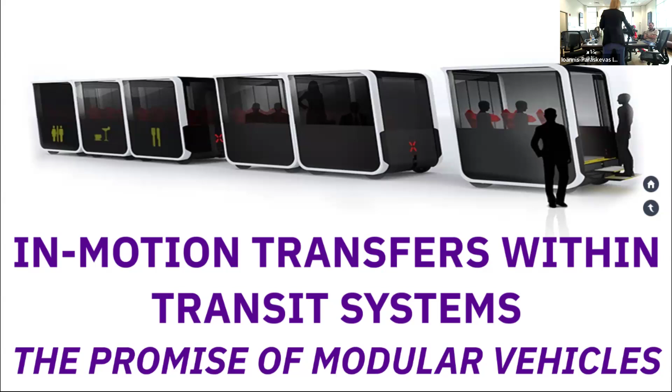Now, I understand public transportation is not the thing here in South Florida. I used to live here, so I know it could certainly be much better. But public transportation is way more sustainable than cars, right? From many different perspectives, it has a smaller environmental footprint and a smaller spatial footprint, so we can move more people in a smaller amount of space and with fewer resources.

So then why isn't it appealing in places like South Florida? There's a lot of traffic. I spent a lot of time today traveling from Miami here by car. So why are we still stuck to our cars if public transportation has so many benefits?

Because it also has a lot of challenges, and challenges differ across cities, etc. But I'm going to focus today on three challenges that are quite prevalent in cities around the world, and I'm going to try to address those challenges throughout the presentation today.

So first, the idea of bus bunching. I don't know if you've heard the terminology, but bus bunching is a well-known issue for quite a while. The idea is that with the stochasticity in traffic conditions, etc., deviations in headways, or the time between buses, compound over time. So what you end up having is buses bunching together, a lot of buses coming at once and then no buses at all. That presents an issue of reliability.

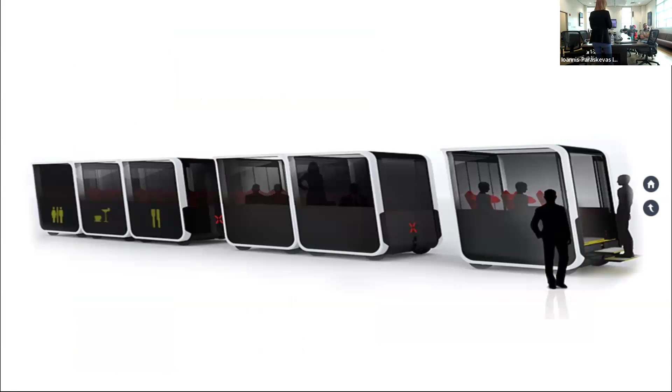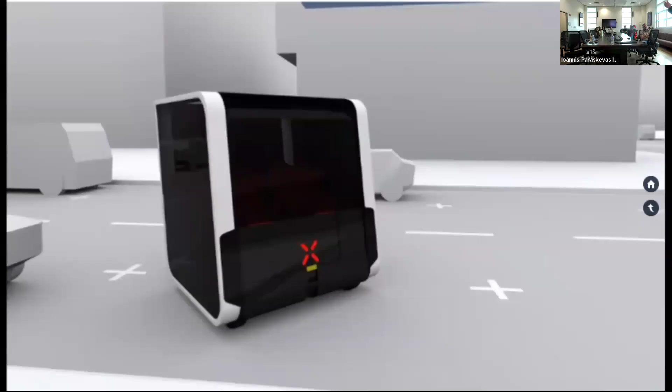So my proposal, or our proposal, is to use modular vehicle technology to address that. Now, I'm not sure if you're aware of modular vehicle technology — what is it? These are individual vehicles, or pods, or units, that can travel individually, or they can come together as a single bus or a single vehicle of higher capacity. The idea is that people can move between the vehicles while the vehicles are moving. That's what I call in-motion transfers.

The capacity typically for this specific company is 6 people if everyone is sitting, or 20 people if everyone is standing. But there are quite a few companies that are working on this.

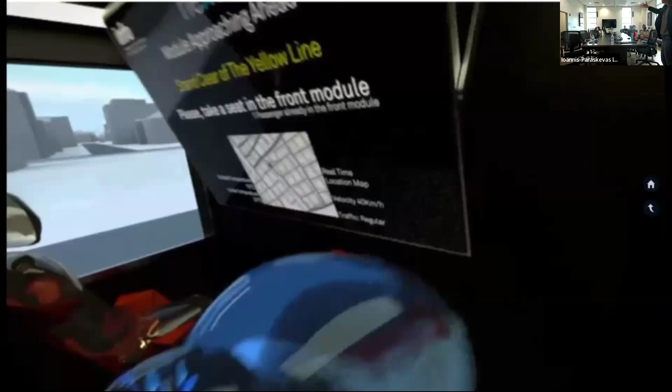The vehicles can split from each other or decouple and take different routes, or come together and form sort of a platoon within the same route, on the main route. This helps address a lot of the last vehicle mile problems.

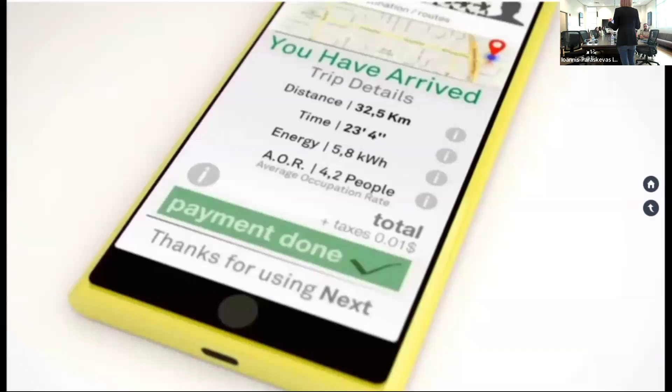There's a lot of studies about this, using this for on-demand transportation. All the cases that I'm going to be showing today are for fixed route public transportation or fixed route buses.

If I want to highlight the main features of this technology: their autonomy, the fact that these are autonomous vehicles, although they could have a driver. They're electric, so all the advantages associated with electric vehicles.

They offer variable capacity because you can have one small pod or multiple pods coming together and creating a bigger bus. And in-motion transfer between the pods, meaning people can move between the pods while they're moving, while en route.

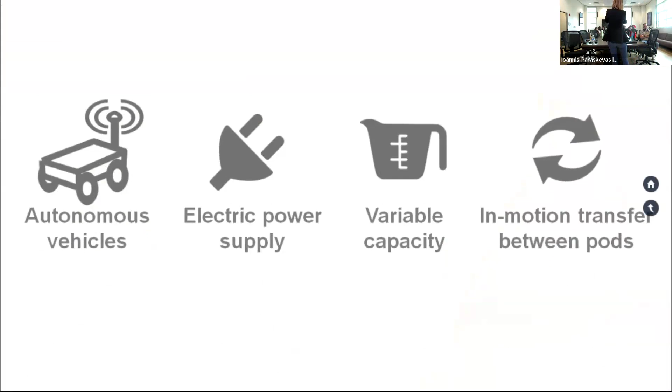For the presentation today, I'm going to be leveraging, in particular, this feature.

Do you have a question or no? Okay, sorry.

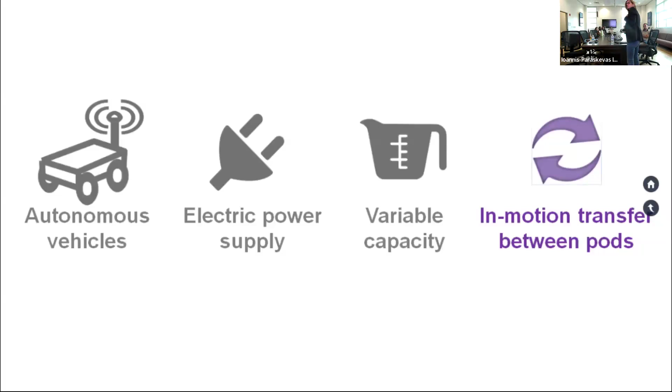The idea is to use this in-motion transfer to address these 3 problems. For the reliability, I'm going to be talking about 3 different sets of operations or proposals that we have for the operations of public transportation.

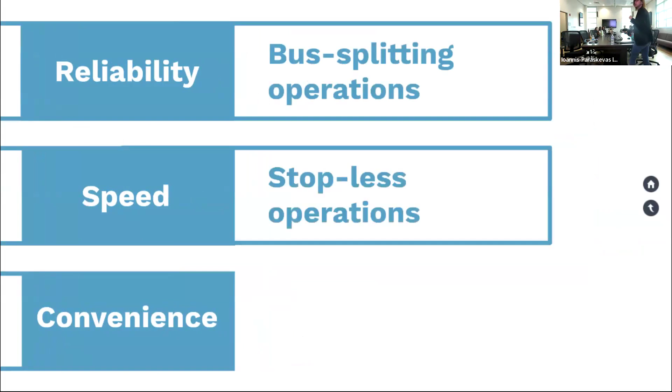To address the reliability issue, I'm going to be talking about what we call bus splitting operations. To address the speed issue, I'm going to be talking about stopless operations, a bus that doesn't stop, I'll go over that later. And for convenience, I'm going to be talking about transferless operations.

So I'm going to start with the reliability thing. As I said, bus bunching is a recurrent problem in public transportation. We have known about it forever.

There are many strategies to address it at the infrastructure level and at the operational level. Still, it's very recurrent everywhere.

One strategy that we're using as a basis or as a benchmark is what's called bus stop skipping. So when the buses are late, you skip a stop.

Now, theoretically, people have been talking about bus stop skipping for a while. Theoretically, it's very good. Practically, it's not, because when you skip a stop, the people who wanted to get off at that stop then have to walk back. And the people who were at the stop waiting for the bus need to wait for the next bus. So even though theoretically it has received a lot of attention, in practice, very, very few operators use this.

So what we propose in lieu of the stop skipping is bus splitting, because we can split now these buses into multiple units. So before I continue, I'm going to share some terminology that is going to be useful throughout the presentation.

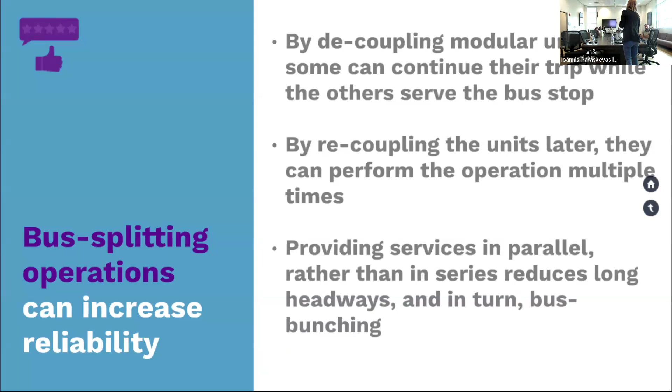So the idea with bus splitting is that these modules, the trailing and the leading module, can couple and decouple, and one of the modules can skip a stop while the other serves that stop, and they recouple later. They can do this operation many times, and that way they serve multiple stops in parallel rather than in series, and that saves time and addresses the issue of reliability.

So let me show you with a graphic more or less how it works. Let's assume you have a bus coming there, and that is running late for whatever reason, traffic conditions or whatever, is running late. So before it gets to the stop that I'm going to call the control stop, that's a stop where it splits.

It doesn't always have to split, if it's running late or something. The passengers must rearrange. If you're going to a control stop, you move to a trailing unit, to the unit in the back, to a blue unit. If you are going to the next stop, you move to the leading unit. The rest of the people can distribute themselves any way they want.

So then these two units, they decouple. The trailing unit stops at the control stop while the leading unit continues to the next stop. They sort of serve these stops in parallel and they recouple later. The blue unit stops here very briefly just to recouple and they continue.

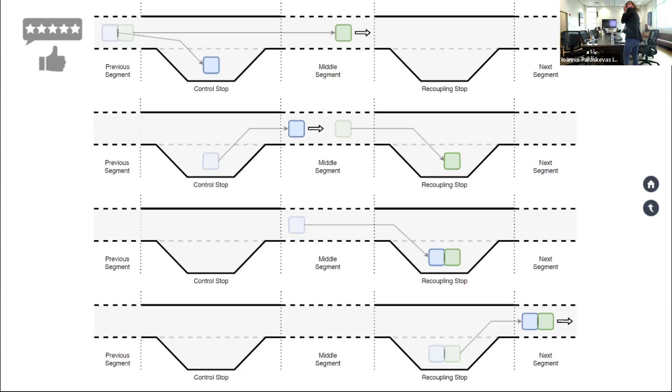So showing you this with a time-space trajectory. I'm not sure how familiar everyone is with time-space trajectories, but I'm just going to go briefly over them because I'm going to show them multiple times.

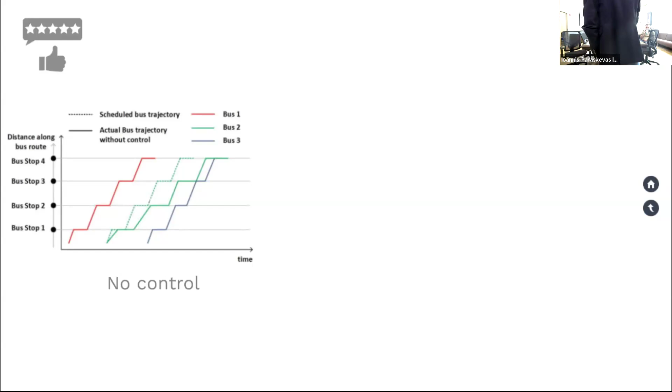But here it goes slower than it should because whatever, there was an accident, traffic. So by the time it gets to stop number 2, there are more people waiting. This is typically what leads to bus bunching. So the dwell time there is a little bit longer because you have more people boarding and alighting, or more people boarding at least. And then even though it catches up on speed afterwards, every time it gets later and later.

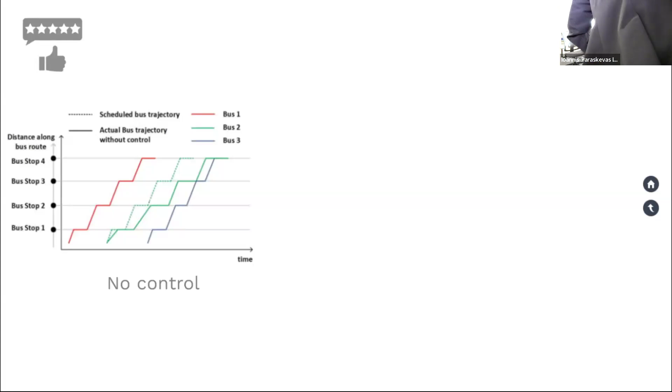The next bus, the blue bus, by the time it gets to a stop, there's less people waiting because the other bus just left. And so these buses start coming together and getting farther apart from the other buses. That's called bus bunching.

In a case of stop skipping, what you would do is that the bus, as it's getting to stop 2, it skips stop 2. So very good for keeping up with the schedule, very bad for the passengers. From the operator perspective, it makes sense. From the user perspective, it's awful.

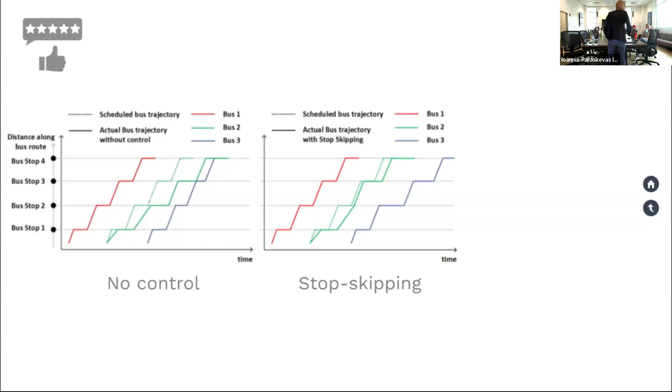What we're saying is in bus splitting, by the time it gets here, the leading unit continues to the next stop while the trailing unit stops. And then they catch up later on.

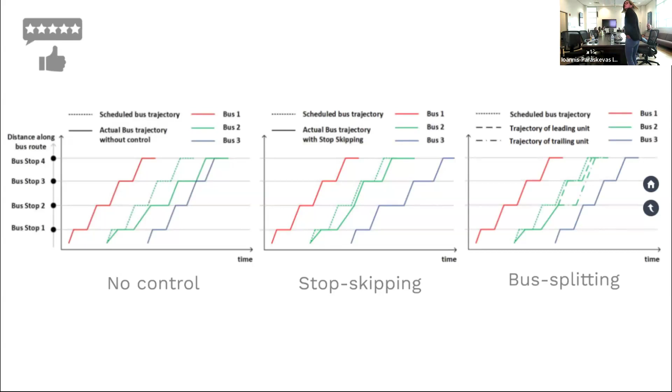So how do we model this? We use a discrete macroscopic model and compare 3 types of operations: what if you have no control at all, or conventional bus system; what if you have stop skipping, which we're using as our benchmark; and bus splitting, which is what we're proposing.

And the goal of what we're doing is to minimize the headway deviations. Headway deviations increase the waiting time tremendously, and the waiting time is worse than the in-vehicle time in terms of passenger experience. So that makes the public transportation system very unappealing. So we want to minimize the headway deviations, the mean absolute percentage error of the headways. And we also want to minimize the total passenger cost, which is waiting cost, plus in-vehicle cost, plus walking cost in the case of stop skipping, because you have to walk back.

And our operations are very simple. Our policies are simple. We are not focusing on the control part here. These are the simplest operations that we could think of for this type of system. They're non-predictive, so I don't know what's going to happen in the future. They're distributed, so each bus is making this decision individually. And they're myopic, meaning you're not looking at what's going on around you or how this is going to affect you. So these are very simple.

Anything that you do better will improve the results. So this is like the bottom line that you can get on the results. Any better control strategy would just give you something better. And the idea is that if the bus is running a little bit late, more than a certain threshold times the headway, then you execute the policy. In the case of stop skipping, you skip the stop. In the case of bus splitting, you do what I mentioned before.

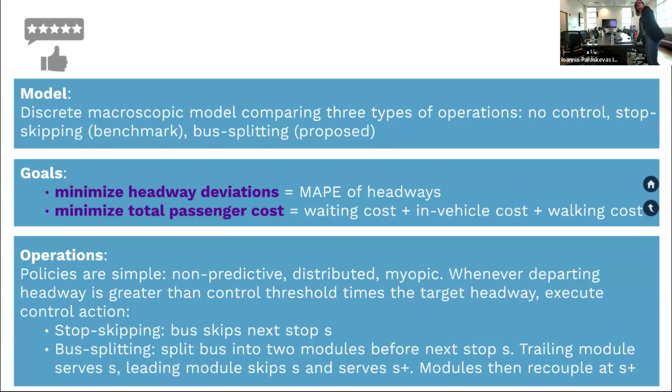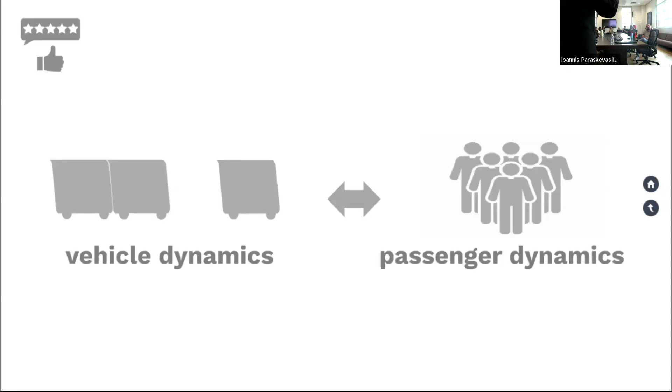And then we have to model the vehicle dynamics, meaning the stochasticity of travel times, when the vehicles couple, when they decouple, how do they do it, etc. We need to model also the passenger dynamics: how people are arriving at the stops, where they're going, when do they board, and the interactions. If the bus is full, people cannot board and have to wait for another bus at the stop, or how people move within the buses when they're decoupling. So we're modeling the vehicle dynamics, the passengers, and the interactions between these two systems.

I'm going to show you results for one hour after some warm-up period, and we start the system from equilibrium. So at the beginning, buses are sticking to the headway, and we just let it run. In the case of a non-controlled scenario, you will see that buses start deviating from the headway soon after. In the other cases, you will see.

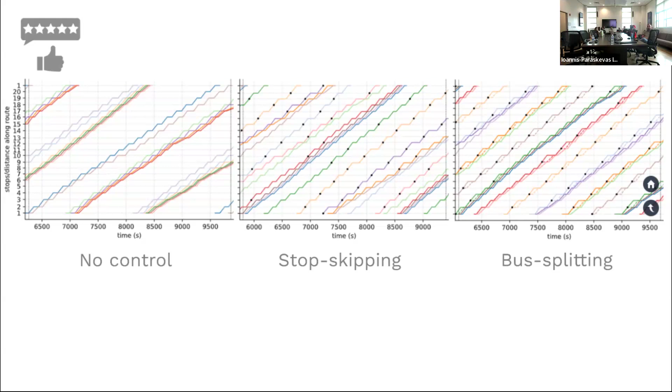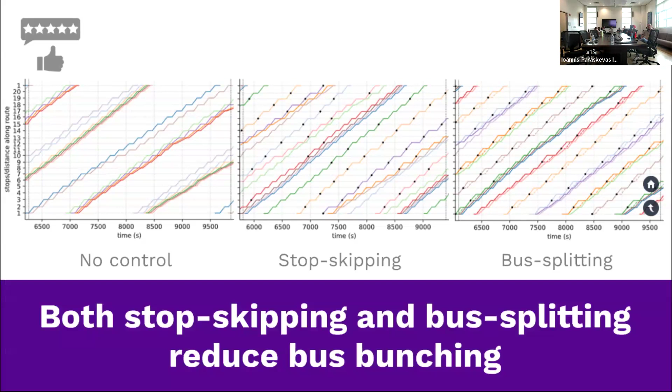In the case of stop skipping, you see a little bit less bus bunching. The black dots are the stops that are skipped. Now from the operator's perspective, this is fine; from the passengers' perspective, every time this happens, passengers have to walk or wait longer. For bus splitting, the dots represent the control stops every time I split the bus. What you can see quickly is that both stop skipping and bus splitting reduce the bus bunching compared to the original scenario.

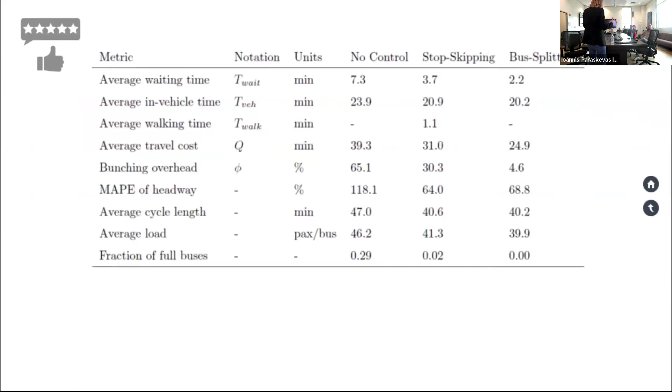Now these are the results for that specific scenario, and I'm showing you one specific scenario to illustrate what's happening. But the insights are the same for all the scenarios that we tested, and I will show you that in a second.

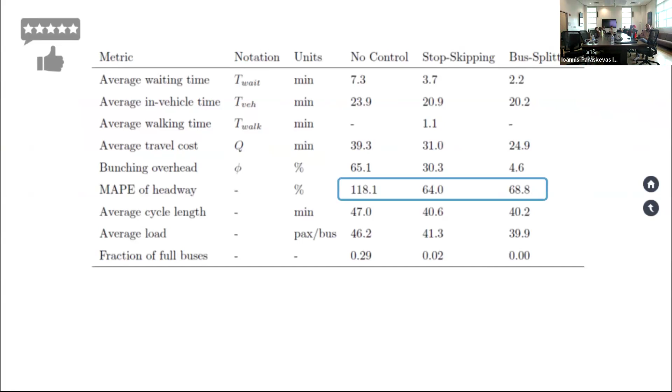So here, this was our main objective: the mean absolute percentage error of the headway. We do much better than the no-control case. And here you see that we do slightly worse—I'll show you this because this is not actually the truth. I'll explain this in a second.

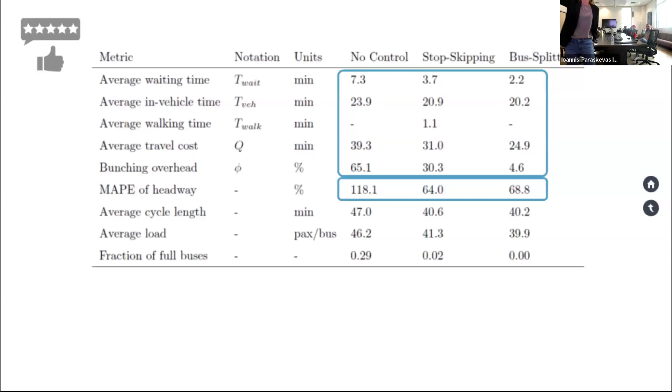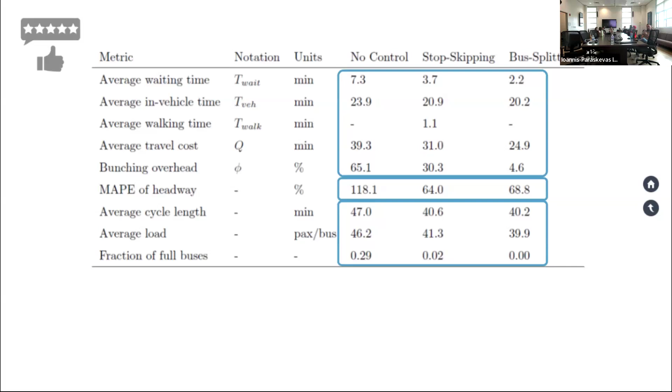But we reduce the average waiting time and the in-vehicle time—there's no walking time in our case. Then the average travel cost, and what we call the bunching overhead, which is the actual travel cost divided by the expected travel cost. We say it's almost zero, meaning there's no cost—bunching is not really affecting the system as much. We also reduce the cycle length; by reducing these deviations, you manage to keep the cycle length shorter. That allows you to reduce the average load per bus, how many passengers, and this is good because you have buses that are less full. And the fraction of full buses, which is also good, because every time you have a full bus, people cannot board and have to wait.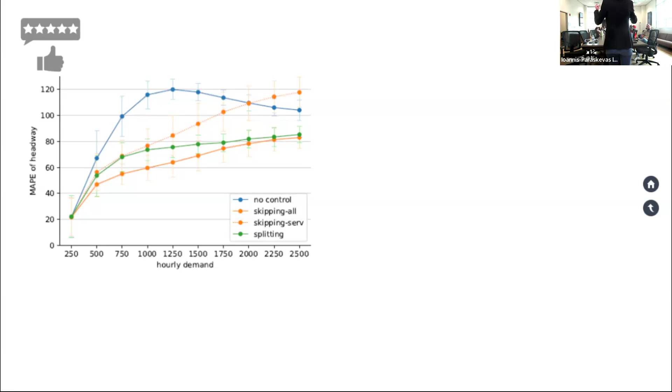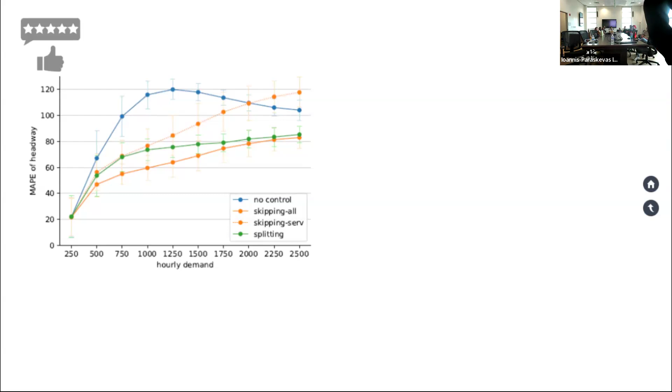Headway, as seen by the operator, is not the proper way of doing it in the case of stop skipping, because you can have an extreme case where all the buses are traveling with perfect headways, but they never stop. So from the user perspective, you spend forever at the stop, right? This dashed line captures that. From the user perspective, every time a bus skips a stop, my headway is twice as long, or longer. So the number I showed you before was from here, but if you look

at the actual user experience, you see that bus splitting does much better always. Same y-axis, same three lines, same colors, but here I'm testing the control threshold. That means how aggressive I am in starting my control option. So 1.1 means a 10% deviation on the headway, and I already start, meaning I already skip a stop or implement the bus splitting. This would mean a 100% error or deviation.

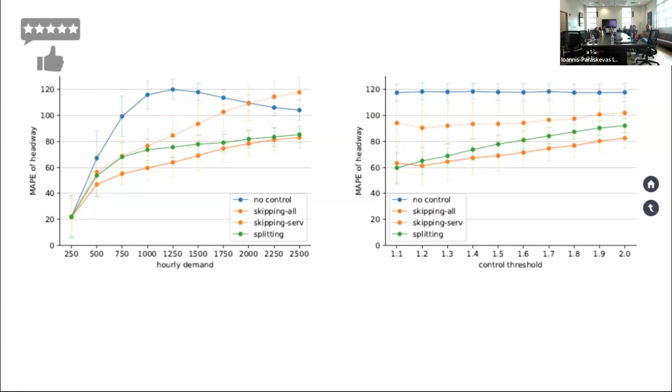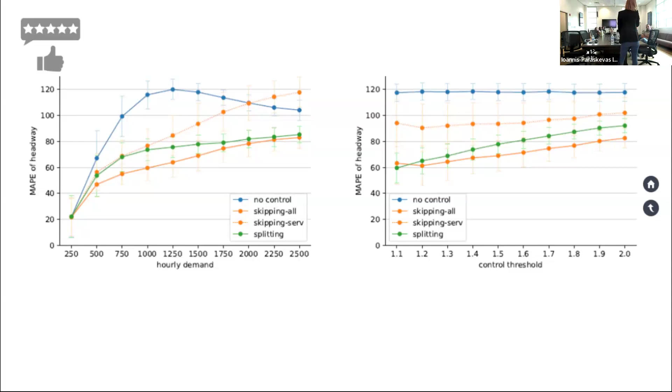Again, in all cases, the green line is better, much lower than the other two. That's not surprising. But what is important is that the biggest differences happen when we start the policy as soon as we see the first deviation. Even with small deviations, we start implementing this policy because there's not a lot of cost to the policy itself, but holding and not doing it, withholding that policy, leads to much worse performance that deteriorates quite fast.

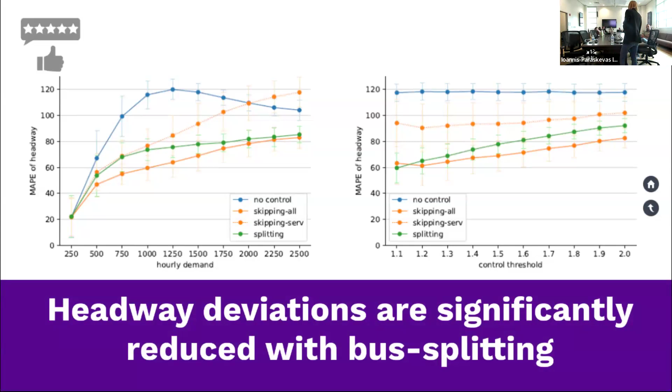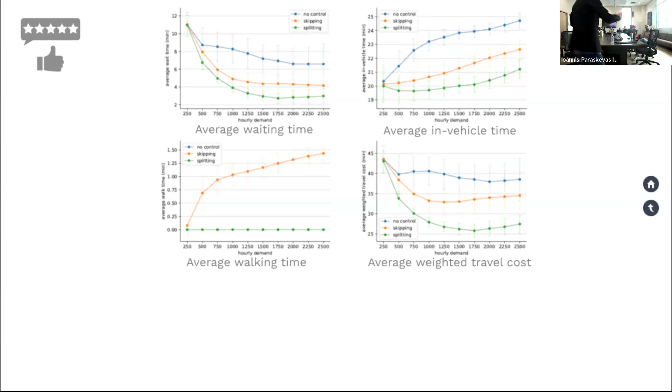So headway deviations are significantly reduced with bus splitting. These are just the components of travel time: average wait time for different demands, average in-vehicle time for different demands, average walking time for different demands, and then the combined weighted average of those. As you can see, bus splitting does better across all dimensions, leading to the lowest travel times across every dimension.

So with our current system, if there's nobody at the bus stop to flag the bus down, or nobody on the bus who wants to get off, the bus is allowed to skip the stop. But does the stop skipping scenario account for even if someone flags the bus down, the bus still skips? On the first part, this happens with some operators and differs across cities. Some operators allow buses to skip a stop if nobody is at the stop and nobody flags it. Some operators don't, and the bus always stops there.

The first one is a better option. But that implies that the buses have triggers and that you can recognize people at the stop. Some operators allow that to happen and some don't. The stop skipping policy is independent of that — it's just saying, even if you have people on board who wanted to go to stop 2, and that stop is skipped, they go all the way to stop 3 and then have to walk back. And if there are people at the stop waiting, they just have to wait for the next bus. So that sucks for the people.

So remember, what we wanted to do was lower the headway variability, and with this we can lower it by up to 50%. We can also reduce the cycle length, which is good because it's a better use of resources — if the buses can go faster around with fewer buses, I can serve more people. And the average number of passengers per bus can go down by about 15%, which is also better for the convenience of the experience within the bus.

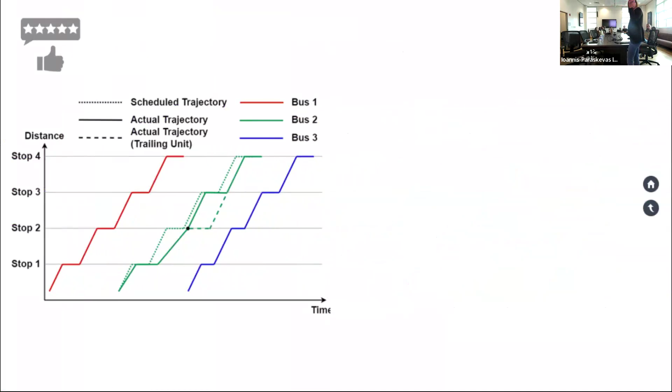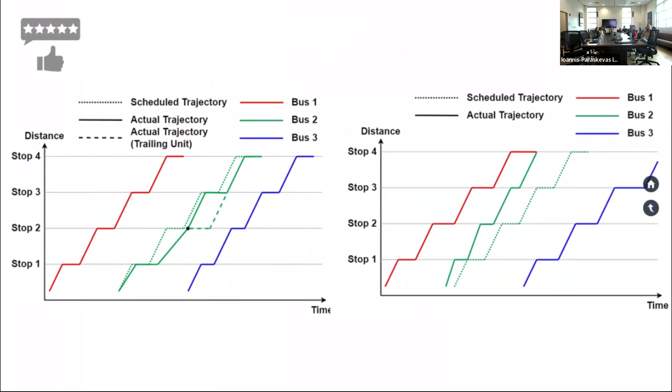But bus holding is something commonly done in practice. This is why it's important. If the bus is late, when I do bus splitting, I catch up with the original desired trajectory, and I can do better. But if the bus is early, this is my original trajectory - I end up with bus bunching over time and I cannot control it. The bus splitting doesn't help.

So what we said was, let's combine bus holding, normally done in many places, with bus splitting. I'm not going to show you all the results, but you have a little bit of bus bunching here with bus splitting alone. This is exactly that scenario when I put together bus splitting and bus holding, using only one control stop, the first one. The more control stops you have, the better off you are, because it gives you more flexibility.

So you can see it not only reduces bus bunching, but also reduces the number of black dots, meaning the need for bus splitting. When I put these two things together, I eliminate bus bunching to a very high degree. We tested this with a real route in China with a lot of data, and it was always the same - we changed a lot of stuff and it always performed very well. In general, bus splitting combined with bus holding can eliminate bus bunching almost completely, and this drastically increases the reliability of public transportation systems, which was the issue I brought up at the beginning.

So with that, I'm going to move to a second set of issues, which is speed, and I'm going to propose stopless operations. Compared to cars, as a public transport passenger you lose a lot of time because of all the intermediate stops. To address that, some operators offer express buses that only stop at specific stops - stop 1, 5, 27, whatever. The issue with that is accessibility, because if you don't live next to one of those stops, or you're not going to one of those stops, you have to wait longer and walk longer just to make it to a stop where the express bus goes.

So how do our operations work? Here we're going to propose what we coined, so it's easier, because I'm going to use this for the rest of the presentation. We call it SLAM bus - stopless autonomous modular bus. The autonomous modular bus is what I showed you before, but now it's stopless because it doesn't stop.

I'm going to have two modules now. The modules can have any number of units, more than one unit or more. Before I had leading and trailing; now I'm going to have a main module and a service module. The idea is that the main model moves throughout the system without stopping, and the boarding and alighting at the stops is relegated to a service model, which goes to the stop and then catches up with the next bus. So this is like a train that is non-stopping, and then you have a piece of the train that goes to a stop and then catches up.

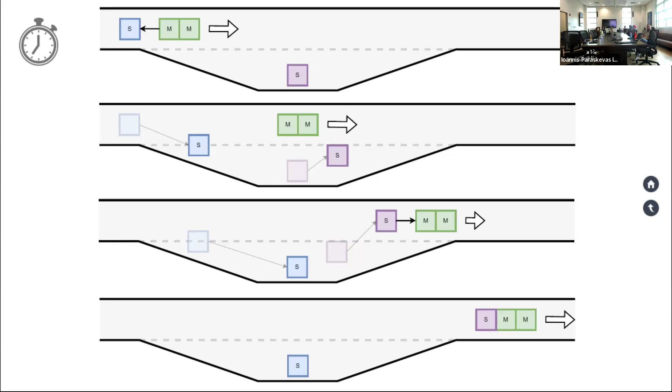So just to give you an idea how it works: the bus comes together with the main model and the service model, these two parts at the top together. As I'm approaching a stop, people who are going to get off at that stop need to move to a service model, anyone else should move to the main model. The service model detaches or decouples and goes to the stop. In the meantime, the main model continues at speed. Meanwhile, there was another service model at that stop that had been waiting there since the last bus passed, serving the boarding passengers. This one leaves the stop and catches up with the main model, then continues until the next stop, and you repeat the process again and again. You basically have one sort of train moving around, and one model catches up with it, another model catches up and leaves.

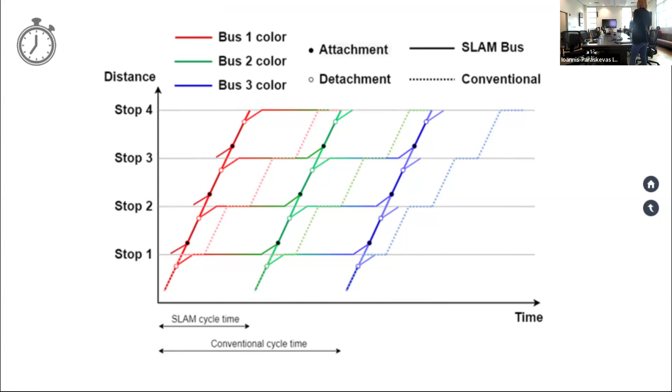So in terms of time-space diagrams, this is how it would look. This is the main bus, and these are the models that go from one bus until it catches up with the next. We're putting changes in color just to show you it goes from one bus to the next one. A traditional bus would do this, the dashed line. Our SLAM bus is doing this. What you can see is the cycle length of a traditional bus is this, and the cycle length of a SLAM bus is this, so it's much shorter. So your in-vehicle time is much shorter, so your speed is higher as a passenger.

We model this again with a macroscopic, discrete macroscopic model, and we compare two strategies: a conventional bus and the SLAM bus, which is what we're proposing. Our goal here is to minimize the passenger travel cost, which is the waiting cost and the in-vehicle cost, and we also want to minimize the fleet size required, how many pods we have to serve a given demand. The operations are what I described before.

The main bus bypasses each stop while swapping the service pods. Sometimes I have very busy stops, and then the service pods, or the service model, doesn't have enough capacity to hold all the passengers that want to alight or that will board. In that case, I will stop the whole bus there.

Now, these stops, we call them stops for the whole SLAM. They can be scheduled or unscheduled. A scheduled stop is a train station—everyone is going to a train station, or it's a hospital or something, and you have a lot of demand going there always, so my bus always stops there, the whole bus. Unscheduled is when suddenly I get a lot of passengers at that stop, or a lot of passengers that want to alight at that stop, and they don't fit in the service model. So I will stop the whole bus there, just that time. I don't do that often, but this time it makes sense to do it.

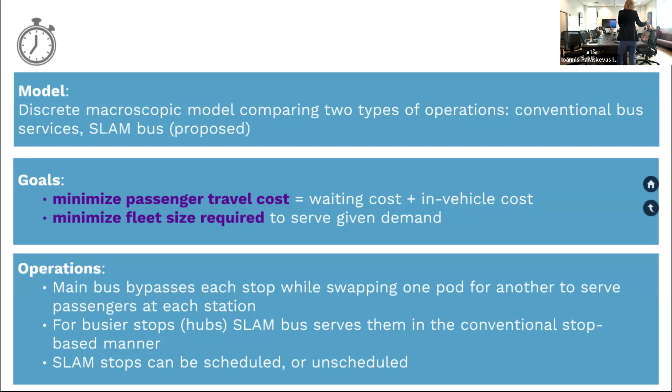These are, again, the parameters I'm using. We're looking for realistic conditions, so we use a realistic cyclic bus route, but I had all the stuff drawn from normal distributions as before. We do 100 iterations because there's not that much variance, so we don't need 500 iterations. I show you the results for 1 hour after some warm-up period, and I'm going to compare two types of operations: conventional and SLAM.

In both cases, I'm going to be using the pods, the modular units. In the conventional case, I'm just going to put them together as a bus, as a normal bus of bigger capacity. I'm going to have the same number of pods in both—every time I compare a scenario, it's the same number of pods. But that doesn't mean the same number of buses, because I'm going to have more frequent and smaller buses here, less frequent and bigger buses there. The total number, the fleet size, in terms of number of pods, is going to be the same. Then I'm going to look at different combinations of pods, number of pods per bus.

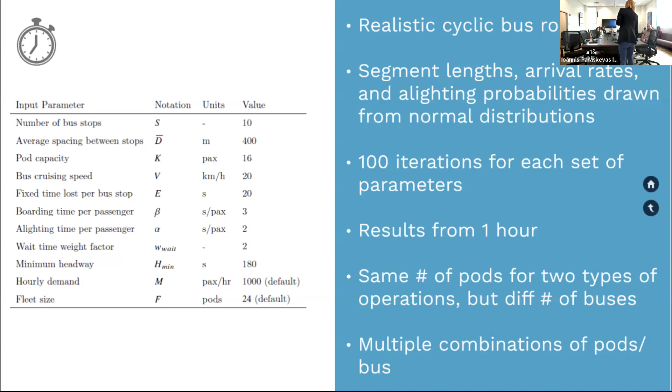This is how a conventional bus would look like, and this is how SLAM would look like. The steeper line is because you don't have the stops. The steepness of the line means the speed of the vehicle.

In this specific case, we did one scheduled stop, which is the first stop. So this is a scheduled stop, you see the bus always stops there.

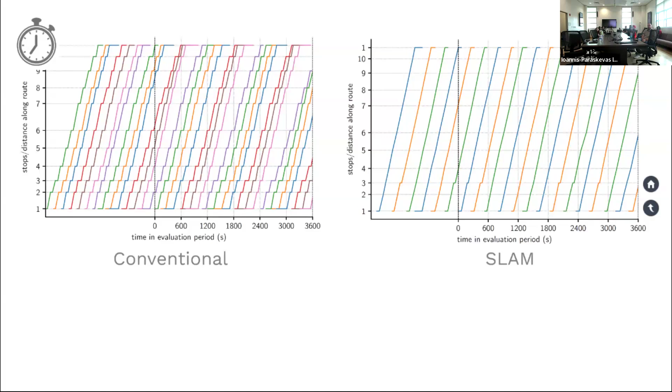This here is because of randomness, and it's an unscheduled stop. I know it's unscheduled because sometimes it stops and sometimes it doesn't. This is for one specific scenario. We did many scenarios, and in other cases we have more unscheduled stops. But what you can see is that the speed is higher, but also the headways are more constant.

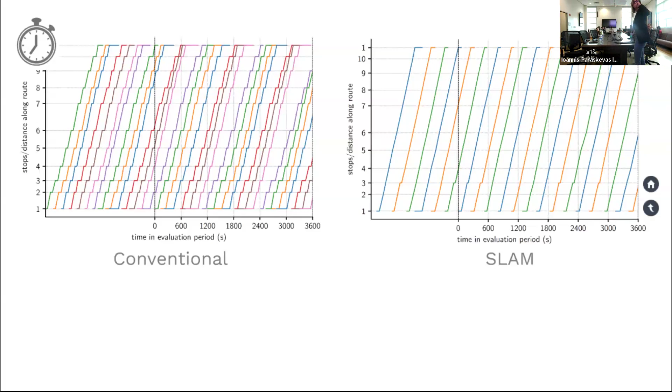So it's also addressing the reliability issue that I mentioned before with the bus bunching. SLAM typically outperforms conventional bus services in terms of speed and reliability. These are the results for that scenario, for that specific scenario.

However, the savings in average cycle time are so large that overall the travel cost is smaller. The longer headway leads to a longer waiting time, but the savings on travel time are so large that the average travel cost goes smaller, even though waiting is worse and it's weighted more than in-vehicle time. So SLAM leads to significant travel cost savings, and this is true for most of the scenarios that we saw.

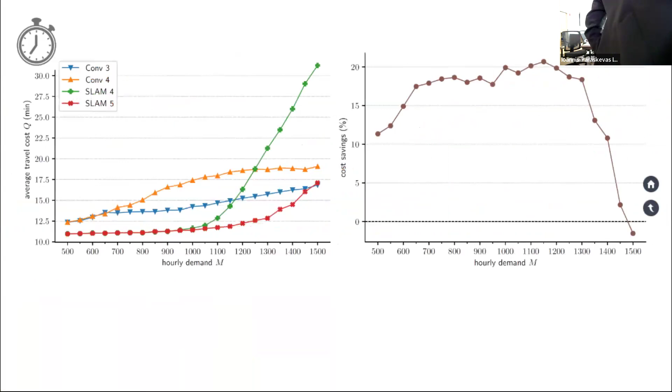So what is important here is that time savings are apparent for some, but not for all configurations of SLAM, and I'm going to go over that in a second. This is the average travel cost, which is the combination of the 2 previous costs. And this is the cost savings offered by SLAM.

This is the best SLAM service, which in this case is red, over the best conventional service, which is blue. Now you can see that as demand increases, the cost savings increase over 20%. But at some point, if demand becomes too high, the cost savings start decreasing and can become negative.

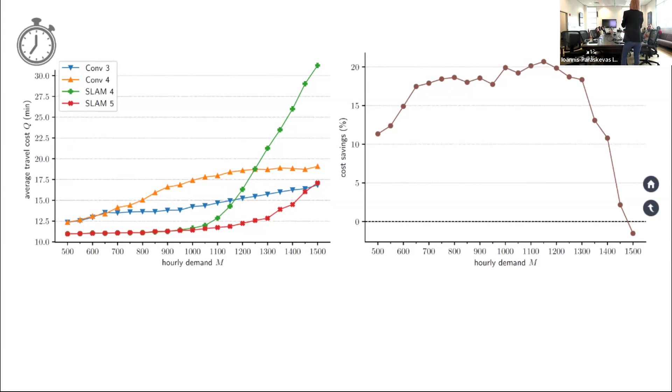This happens because if the demand is too high, the service module is not enough to hold everyone that wants to alight on the pod, and I need to make a lot of unscheduled stops. When I start making a lot of unscheduled stops, it becomes sort of a conventional service in terms of speed, but then it's less efficient because I have the service pods waiting there. So I have less pods moving around - I'm losing speed and not gaining efficiency in terms of capacity. So for very high demands, it might not be good in this case.

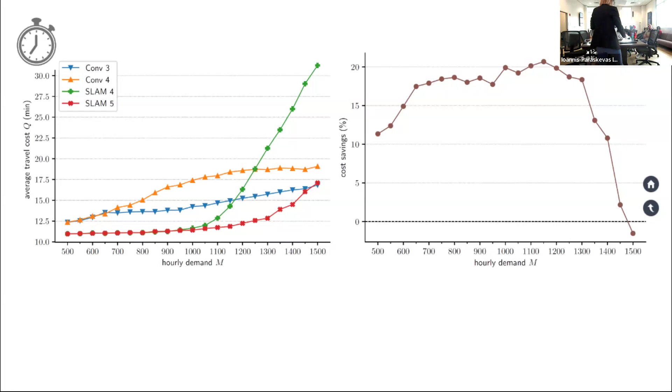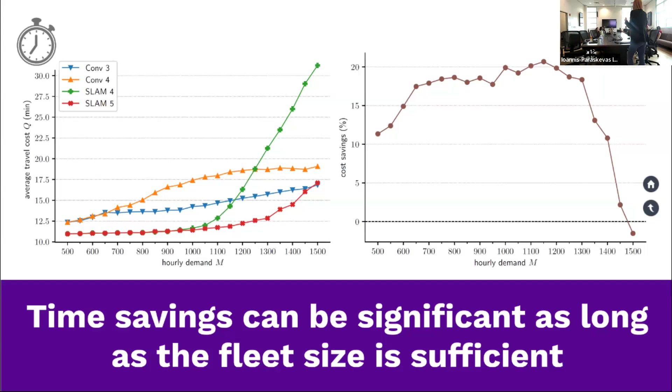I could address that by increasing the fleet size. So this is if I use the same fleet size for both conventional and the other one. Basically, time savings can be very significant if the fleet size is sufficient, if I have enough pods. At some point, if the demand is too large and I don't have enough pods to serve that demand, then conventional service outperforms SLAM.

Now, when it's feasible, total travel times can go down by 20%. It's great - this is total travel times, so that's waiting plus in-vehicle. And waiting goes up, so in-vehicle actually goes down even more. And the cycle length can go down by up to 35%.

Now, the cycle lengths go down because there's no dwells, there's no stopping, right? And we know in urban areas, you tend to have a lot of stops, so a lot of time is wasted at the stops. The total savings in cycle length pretty much depend on the balance between travel time and stop time.

Because you're removing a lot of the stop time—not all of it, since you can still have some stops—but you're removing quite a bit of it. So overall, SLAM eliminates dwell times and increases the travel speed between stops to values that are actually comparable with that of cars.

This also increases the reliability of the system, as long as the fleet size is enough for that demand. And another thing I need to highlight, though I don't have time to go over all the details: not all configurations for SLAM, even with the same fleet size, are optimal. So it's worth exploring what is the right configuration for that specific setting.

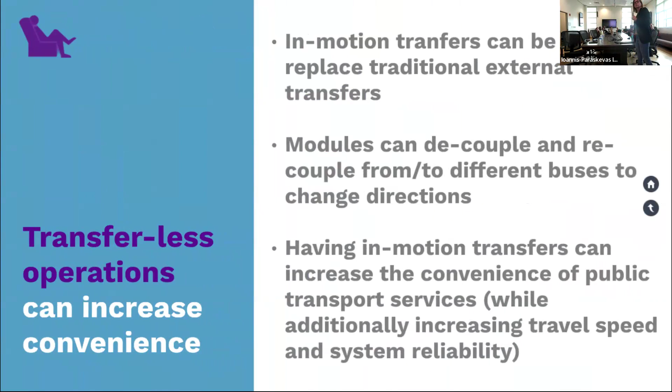This, by the way, still increases speed and reliability. So it builds on the previous concepts and addresses the same two issues. Now I'm going to show you two examples: one is a feeder and arterial system, and the other is a bus rapid transit system. I'll try to go relatively fast.

The feeder and arterial idea is that I have an arterial served with a SLAM service, the same as before, but each stop at the arterial has a feeding zone where passengers move to that stop. In the previous case, the service modules for SLAM were just stopped there.

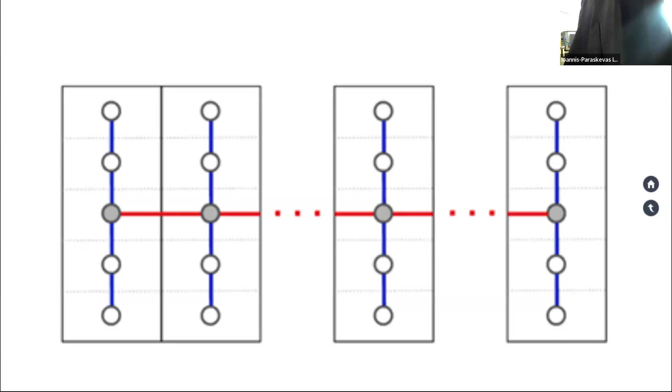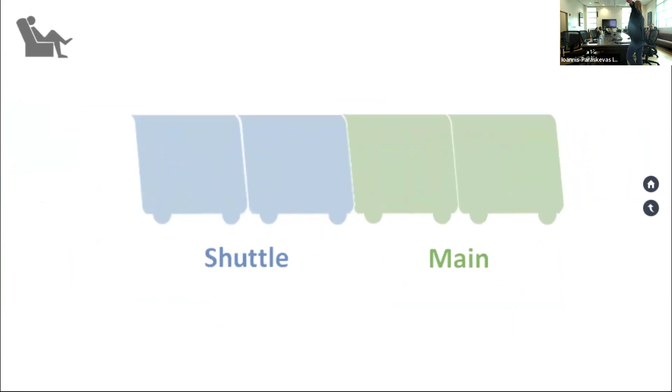Now I'm going to allow those modules to move around while waiting for the next SLAM, dropping off and picking up passengers from this area. So rather than having the modules just sitting there, I'll have them moving around like shuttles. Before I had a main module and a service module; now I'll have a main module and a shuttle module, because that module is not going to be stopped there—it's just going to be moving around.

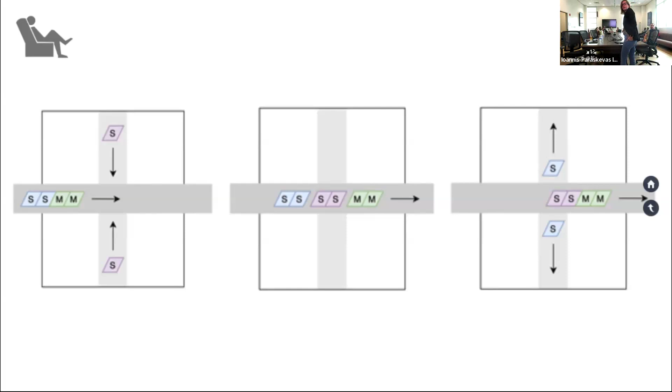So let's say this is the arterial: you have the main module and the shuttle module. As they approach, passengers coming to this area move to a shuttle module, while anyone going to another area stays on the main module. The shuttle module detaches, and another shuttle that was around comes and attaches, and then the process starts all over again at every stop. We call this shuttle SLAM.

It's pretty much the same thing as before—I compare it with the conventional service. The idea is to avoid external transfers and minimize waiting costs, in-vehicle costs, and transfer costs. I have the SLAM operations for the arterial, where I can have unscheduled stops and scheduled stops, the same as before. But for the feeder service, I just have a conventional stop, like a conventional service, where you stop at every stop.

Why? Just because it was easier to model, and we were focusing on the overall concept—there are many other alternatives to this that would be better.

Now, the headways must be carefully synchronized, because I need to make sure that the people do this, the shuttle does this, but by the time the SLAM arrives, it's already there. So we put a buffer time in as well to make sure that happens. But you need a lot of synchronization between the systems.

We use a realistic bus route. Now we use a deterministic environment just as a starting point, with homogeneous demand among the zones and no intra-zone trips. So there's no people traveling within the zone, or at least we don't care about them.

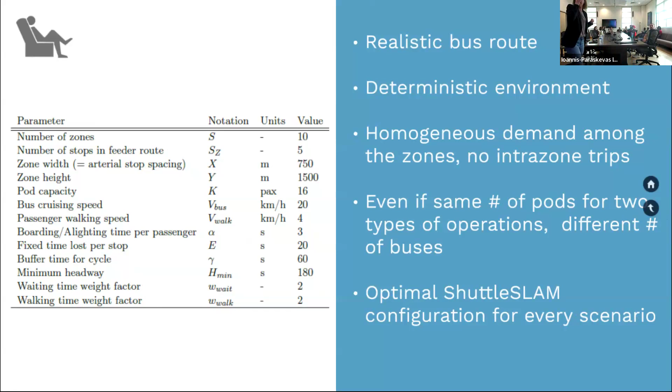When comparing with the conventional service, we make sure we have the same number of pods, even though that means a different number of buses. And we look at the optimal shuttle SLAM configuration for every scenario.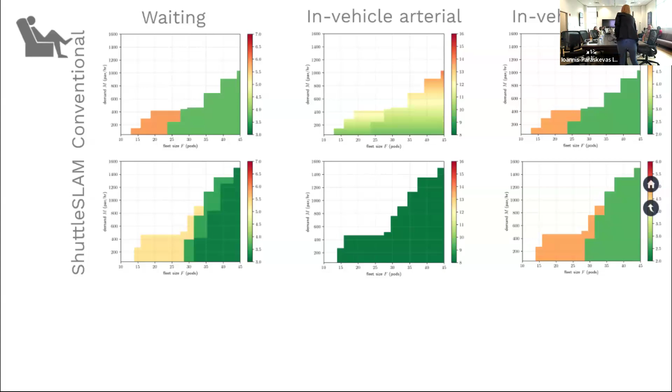For the in-vehicle time in the arterial and the waiting time, shuttle SLAM does much better. This is where it shines, and that reduces the overall trip cost.

This shows the actual savings of shuttle SLAM compared to conventional. So negative savings means conventional is better, blue means up to 20% savings. Now, the gray area shows a combination of fleet size and demand where shuttle SLAM is feasible but conventional is not feasible. When I say it's not feasible, it means your fleet size is not large enough to carry everyone.

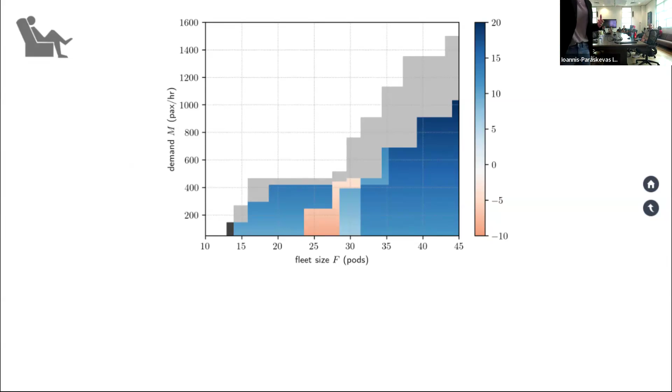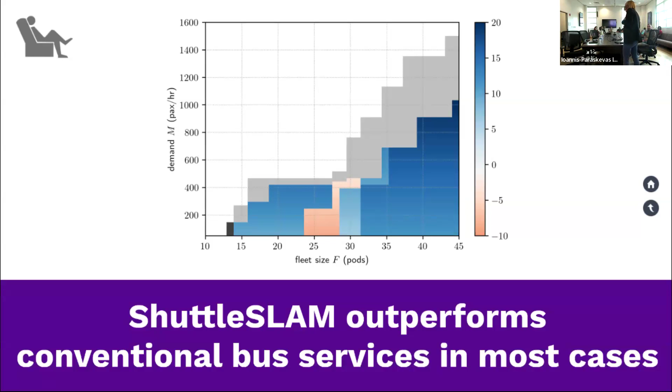This little black square here is the area where conventional is feasible but SLAM is not. Overall, shuttle SLAM outperforms conventional bus services for most cases, and it has a larger feasibility area, which is great. It goes without saying, but you have no external transfers, and the total travel times go down by up to 20%.

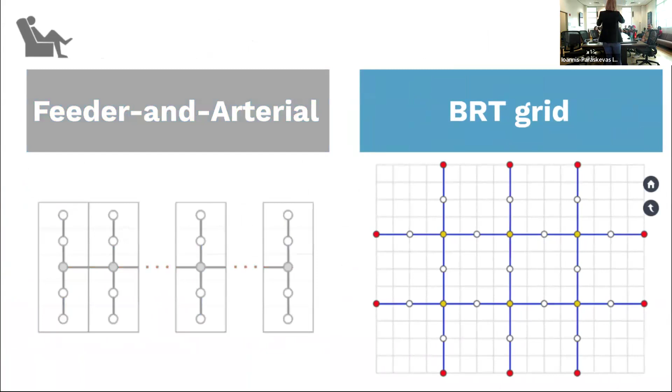Okay, so the next case is the BRT. BRT stands for Bus Rapid Transit System, and these are transit systems with high capacity and very frequent buses, but the lines tend to be very sparse. So if you have a grid system, this will be the city. You don't have lines very often, because these are high frequency. It's like a metro but with buses.

You typically have dedicated infrastructure. The yellow dots represent, in this illustration, the intersections between two SLAM lines. The white dots represent normal SLAM stops, and these are just terminal stops. Let me quickly explain how it works.

Now, this is the most complicated case because my bus has 4 modules: from back to front, a service module, central, a right and a left module. Why? Because people transferring lines don't get off the bus, they just get off their module. They transfer their module, and their module transfers between lines. So some specific pods transfer between lines, people don't have to get off the bus.

The way it works is you have the whole bus here: service, central, right and left. As it is approaching a SLAM intersection, people who are going right move to the right module, people who are going left move to the left module. Then they move like this, and the ones coming from here catch up and reform the bus.

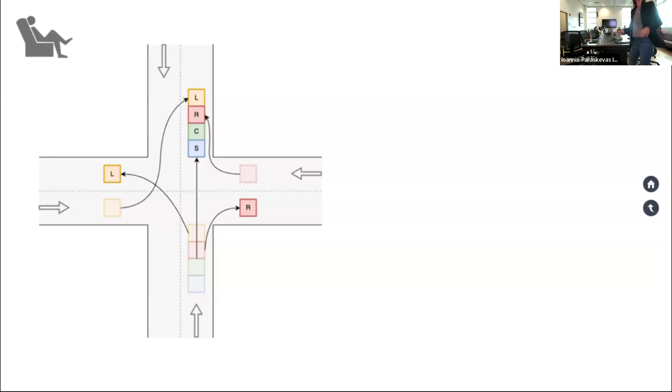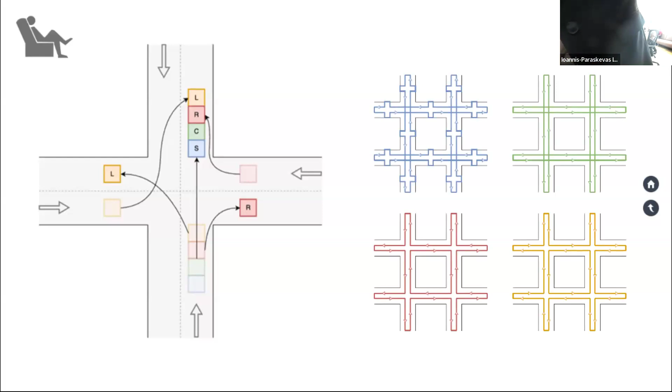This gives you more or less an idea, a very simple diagram of the path that each module takes. The service module is the one that stops at every stop. The central module is the one that follows that line from beginning to end. The right module is always turning right, and it doesn't matter if it's a 2x2 or a 27x27 grid. The left module does the same thing, but always turning left. We call this a SLAM BRT.

Again, what we want to avoid is external transfers, and minimize the waiting costs, vehicle costs and transfer costs. The complexity here is the synchronization of the buses at the intersections. We had to put in some buffer time, and we actually have to stop the buses right after the intersection at the next stop to catch up there. I'm not going to go into the details, but that's where the complexity comes in.

And for that, we assume that there's dedicated infrastructure. BRT typically has dedicated infrastructure, because otherwise it's impossible to keep that level of synchronization, like if buses are getting caught up with traffic, etc.

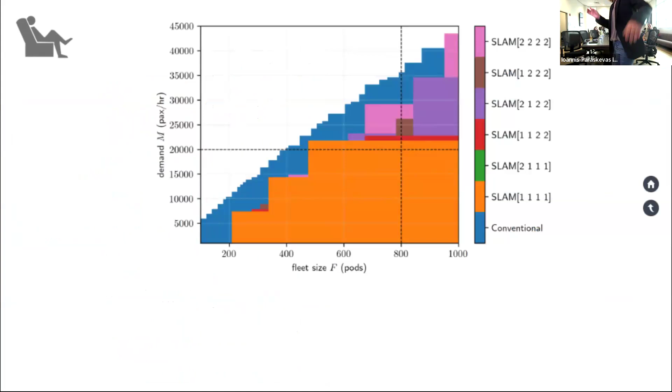This is pretty much the same as before, but now we have a lot of parameters because the problem is way more complicated. For a combination of demand and fleet size, I'm showing how many pods I have at different levels of demand, just the best configuration. Blue is conventional buses, and these are different configurations of SLAM. The numbers indicate how many units are in service, in central, right and left. So here I have 2 right, 2 left, 1 central, 1 service, for instance.

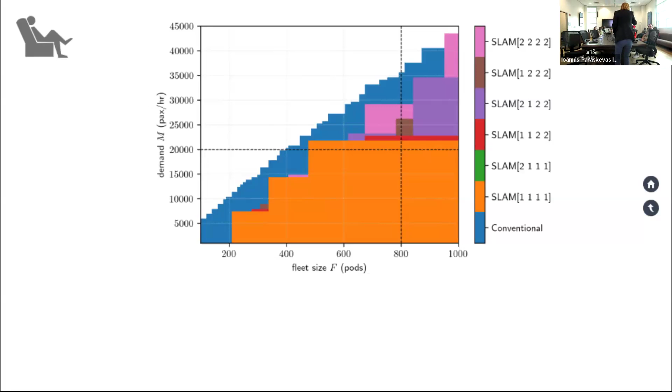The bottom line is this blue area where conventional is better, because SLAM BRT is not feasible there, it's not enough to hold that demand. As long as SLAM BRT is feasible, it's always the best combination. It always outperforms conventional, and it typically does so with the smallest number of pods possible that are enough to carry that demand. So when feasible, SLAM BRT typically outperforms conventional bus services.

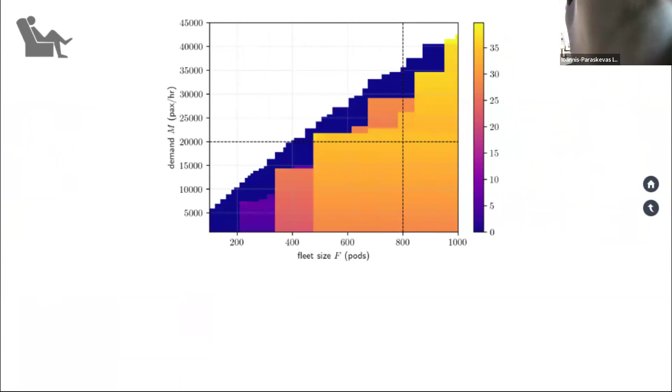And here you see the savings. Again, this area has no savings because SLAM is not feasible here. But for the rest, SLAM really outperforms, and the savings can be quite significant. Bottom line: no external transfers, and total travel time savings of up to 35%.

As a summary of this third concept, shuttle SLAM and SLAM BRT can significantly increase the convenience of public transport services by eliminating external transfers. They're also at the same time increasing speed and reliability. The issue here is finding the right combination or configuration for SLAM and making sure the fleet size is large enough, especially in the case of BRT.

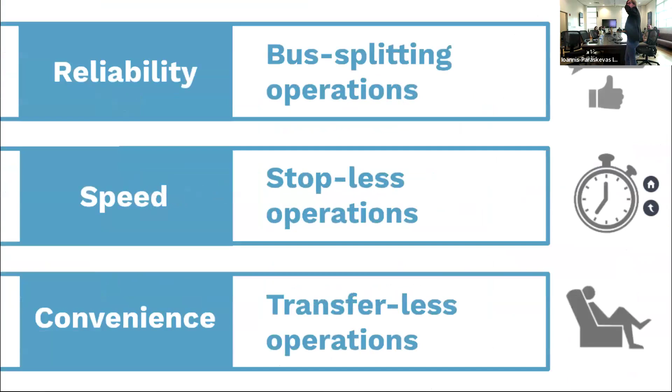So with that, I'll show you how to address these three challenges. One question I typically get asked is how people move within the modules and whether that is feasible or not. If you have two modules, I think it's fairly easy. In many public buses, depending on the city, you get on through the front door and get off through the back door, so you have to move to get off the bus.

But then I found this video from Next. Next is a company that I've been working with—I don't get anything out of them or anything, it's just that they're sharing a lot of their specifications for the technology. It's an Italian company, but there are many Chinese companies that are now doing this as well.

They had this video for Dubai because they're trying to sell this in Dubai and Abu Dhabi. The difference is that they have drivers. They did a pilot study there, a pilot test without drivers, but apparently Dubai wants drivers now, so they put drivers in.

I don't know how to put this video on. How do I do this? I don't know. No, my computer would do something, but... I can click.

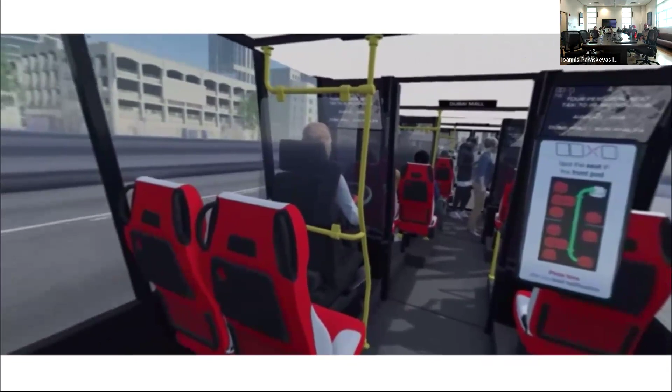So now this is showing you how to move with your vehicle. In the case that we're proposing, it will be easier because the vehicles would always have the same order, and you can even color code them—if going left, it's always orange, and going right is always red or whatever. But it would take some getting used to.

I agree with that. But anyways, the idea is that I show you the basic examples and you can build on them a lot. You can use this modular vehicle technology to increase the reliability, the speed, and the convenience of the system—these are three of the biggest issues public transport faces nowadays.

We're also working on how to increase accessibility by making routes more flexible rather than fixed, and making the system more personalized—addressing your own needs for travel. The idea is to develop efficient public transport systems that make travel seamless and provide a flexible and personalized experience from the user perspective.

This is a big difference with cars—cars are very much about you doing the trip however you want. Public transportation is not like that. But we believe the future is multimodal transportation, and modular buses are part of that ecosystem. They're not the only thing in that ecosystem; we're trying to integrate this with other modes of transportation, with other technologies, etc.

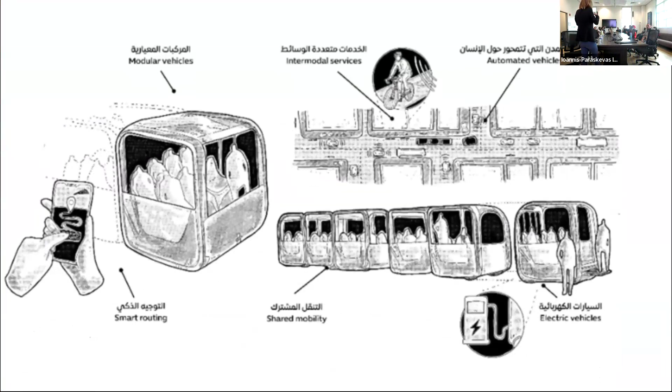But the idea is to use this as part of that ecosystem. And with that, I finish my presentation. I need to really thank this guy—he was the PhD student who did all that work. He's not a PhD student anymore.

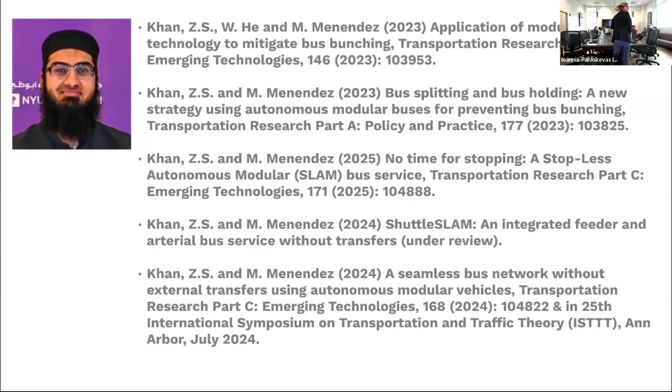But all the stuff that I talked about today is on those papers. He was the one that did everything. Thank you for your attention, and if you have questions - I'm sorry, I went really quick.

If there are no other questions, I have one quick question. Before you ask - sorry, I have a very quick question. In the shuttle system, we have different segments. I'm curious, if we have an accident or disruption for one segment, what happens to the whole system?

Yes, so it's fair - what happens when we have disruptions in the system? We typically put in buffer times, and our buffer times are not super small, so it's a cost embedded into the system. It's not as efficient as it could be, because of the synchronization, if delays go beyond that buffer time.

There are many other ways of doing this. What I proposed today is the basic approach, where you leave this slam and catch up with the next one. But you could do that every 2 slams - you leave this slam and catch up 2 slams after, and the next slam catches up 2 slams after that. That gives you more buffer time. So there are other ways of doing this.